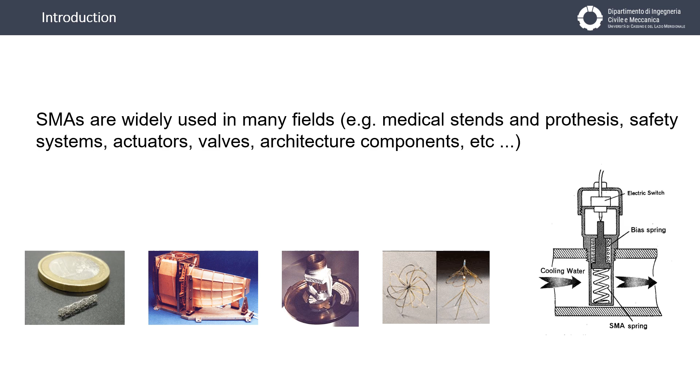There are a lot of shape memory alloys. For example, the copper-based shape memory alloys, which are characterized by not so high performances due to problems of the microstructure close to the grain boundaries. Other shape memory alloys are the nickel-titanium ones that are now most used thanks to their performances and chemical resistance.

So, the recovery of the initial shape takes place if the temperature is greater than a critical temperature and the material is able to recover the initial structure. In case of the environment temperature lower than the critical temperature, it is necessary to heat the component to recover the initial shape, and in this case the material is named as shape memory.

Elsewhere, if the critical temperature is lower than the environment temperature, the material is able to recover the initial shape without extra energy, recovering the initial shape by itself. In this case, the material is named as shape memory alloy with a pseudo-elastic effect.

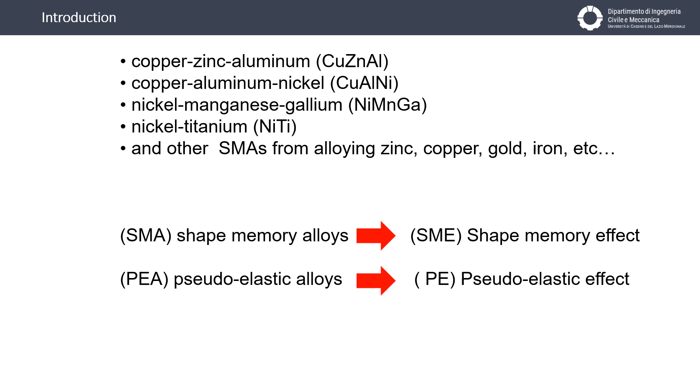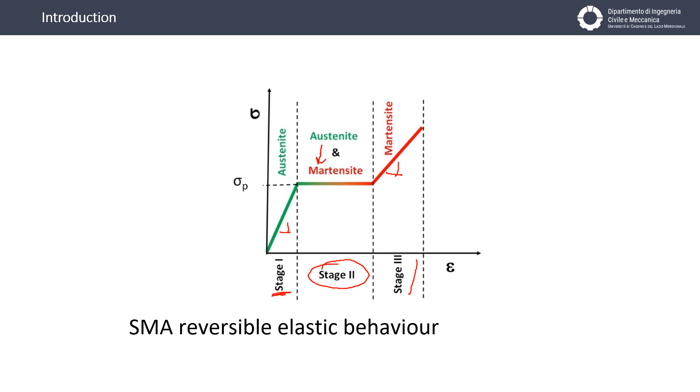And then over this stage, we have the third stage, characterized by a slope different to the slope of the first stage. This slope is the slope of the martensite. This schema is usually used for calculus of the behavior of components, but it is just a simplified schema.

Considering that shape memory alloys are characterized by microstructure changes due to the external loading, the question is, which are the kinds of microstructures we can see in this kind of alloys, and which is the microstructure evolution? And another question is, which is the influence of the microstructures on the behavior of the material in terms of stress-strain?

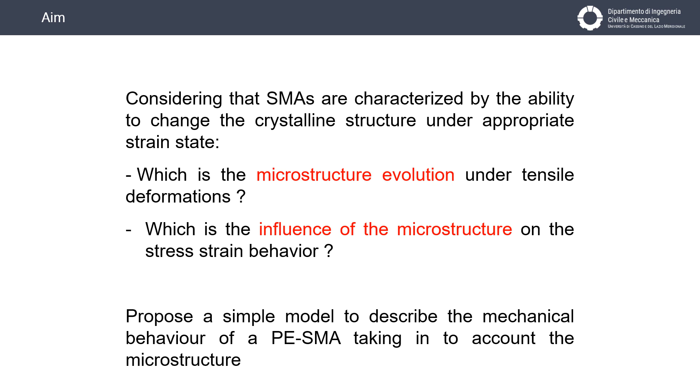In this work, we proposed a simple model able to describe the mechanical behavior of the shape memory alloy characterized by a pseudo-elastic effect, which takes into account the real microstructure of the material. In order to better describe the phenomena, we start from the experimental results.

And the first step has been to produce the material using a vacuum crucible placed in a furnace without air, and using a noble gas like argon in order to eliminate oxygen inside. We use a crucible made of yttria because yttria is very stable in terms of chemical action, and the casting has been in a mold made of graphite, as you can see in the slide.

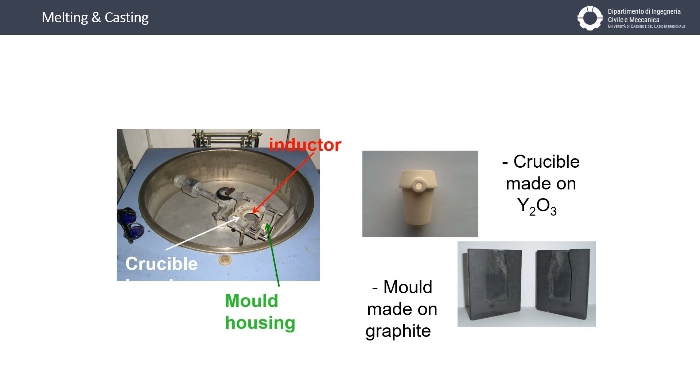The product of the casting is the ingot. It's a very short ingot. The height is around 5 centimeters, and the material has been characterized both in terms of the chemical composition. You can see that the quantity of nickel and titanium in atoms is quite similar, and in terms of microstructure, you can see the magnification. This is around 500x magnification.

Then, starting from the ingot, mini dog bone specimens have been produced like this. You can see that the calibrated length is around 16 millimeters, and the total length of the specimen is 30 millimeters.

This specimen has been put in a tool. It's a patented mini machine, which allows us to perform a loading test using a load cell in order to measure the total force applied on the specimen, and with an LVDT we can control the movement of the crosshead. This tool is able to put the specimen under load inside of a machine able to perform the XRD test in order to observe the diffraction spectrum, which is the base to better understand the position of atoms, and in this case the structure, the microstructure.

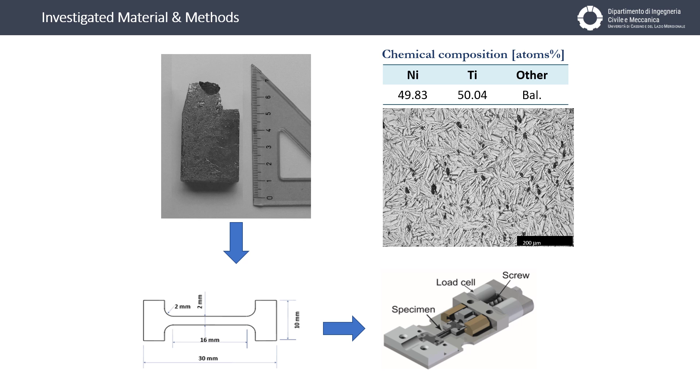Tests have been performed by using a loading and unloading cycle test, and here we can see the first cycle split in two different cases. The first one is the loading condition, with the first stage characterized by the presence of austenite. The second stage is the plateau, but you can see the plateau is not characterized by a slope equal to 0; the slope is greater than 0. It's the minimum slope that you can see in these curves.

Then we have the third stage characterized by the slope of the martensite. In the unloading condition, you can see the third stage is wider than the first one, and then we have a different second stage where we have a transformation of martensite into austenite. It is a reverse transformation, and then the first stage is very short here, characterized by the recovery of elastic energy of the austenite.

In order to analyze the position of atoms in the microstructure, we have to perform X-ray diffraction on the specimen, and we use the tools described in the previous slides, using a step-by-step technique. The steps investigated go from loading conditions to the unloading condition. We used different steps, 2.5% of engineering deformation and so on, up to 10% of engineering deformation. And then in the back direction, we used loading steps in order to perform the diffraction on the calibrated length under load.

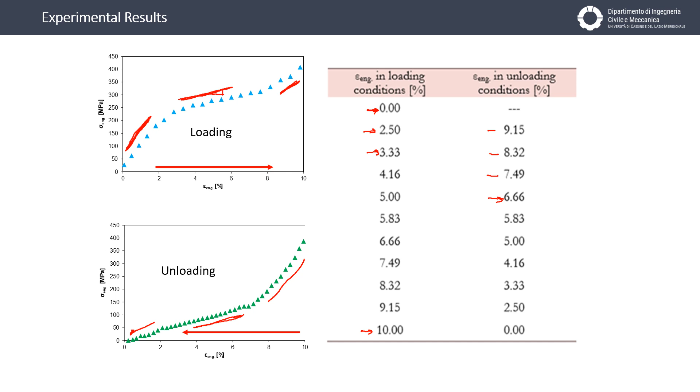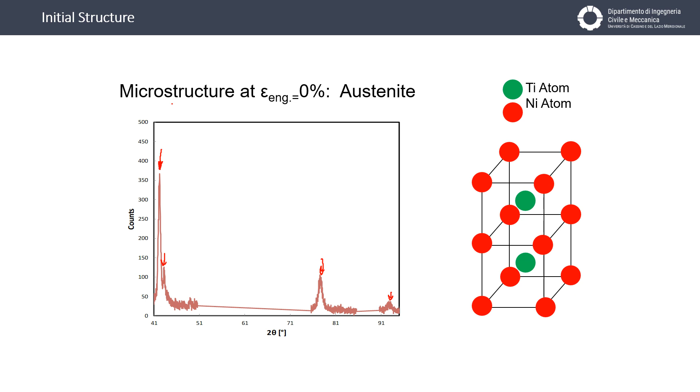This is an example of a spectrum measured by diffraction on the calibrated length in undeformed condition. In this case, the material is characterized by the presence of austenite, and the first peak is the main diffraction peak of austenite, followed by the second peak here and the third peak here. We have another very short peak here, but 3 peaks are sufficient to interpolate the data in order to calculate the cell parameter. In this case, we discovered that the cell is cubic, with nickel atoms on the vertices of the cell and the titanium atom inside each cell.

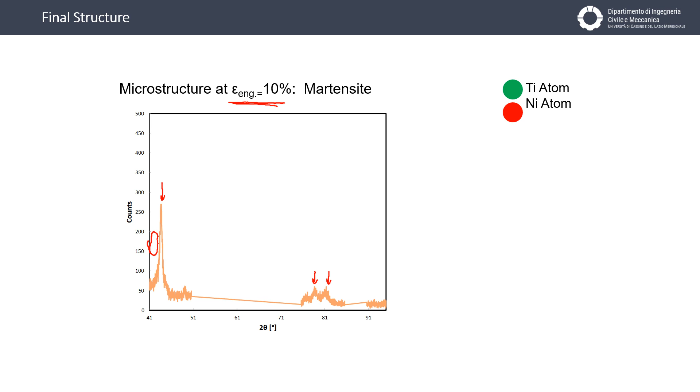The spectrum taken at maximum deformation, 10% of engineering deformation, shows that the first peak of austenite disappears. It was around this position, and all the peaks disappear. It means that the martensite is 100% of the material. And the main peak of martensite is this, followed by the second and the third one. Elaborating these peaks, the microstructure seems to be this, characterized by an angle different from 90 degrees. This is a monoclinic cell, in which the nickel and titanium atoms are positioned on the vertices of the cell.

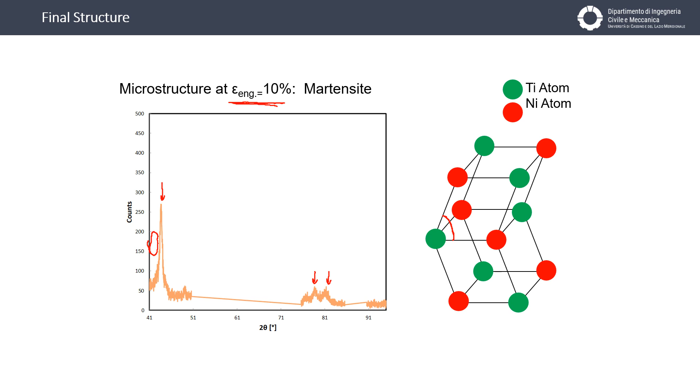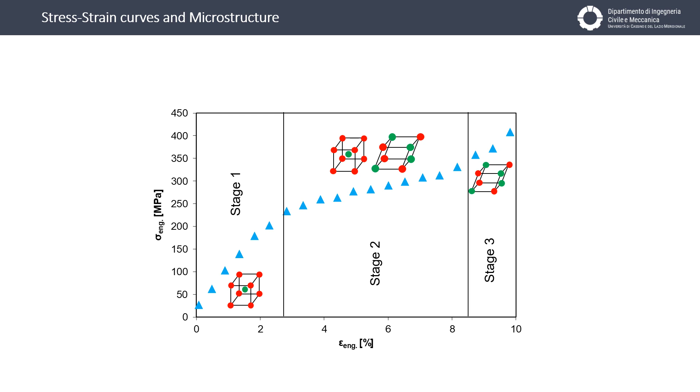It means that, for example, in loading condition, we start with a material characterized by stage 1. Then we have stage 2, sometimes named a plateau, but it is not a real plateau, and the third stage. At the first stage we have a cubic cell. At the third stage we have a monoclinic cell. In stage 2 we have the presence of both of them, cubic and monoclinic cells.

Considering all the tensile steps, in the first spectrum we can calculate the cell parameter of a cubic cell. Using the initial deformation step of 2.50%, we can see that the position of the peaks changes in terms of diffraction angles. It means that we have cubic centered cells, but the dimensions are increased. Then we have the peak of the martensite, meaning we have the presence of the monoclinic cell.

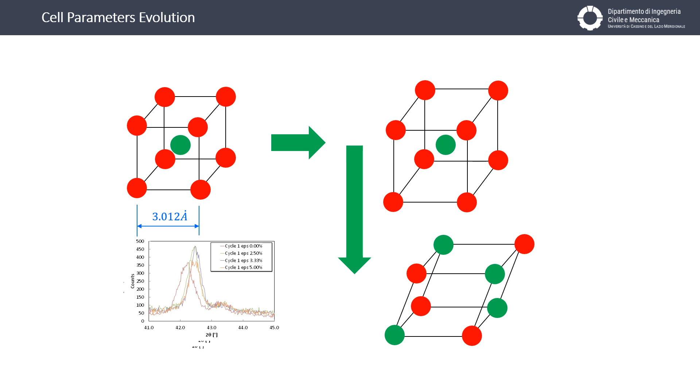To calculate the variation of the cell parameter, from the first spectrum the cell parameter is around 3.012 angstrom. At 2.50% of deformation, the cell parameter increased up to 3.072 angstrom, and the monoclinic cell has an angle of 80 degrees. The first cell parameter is 2.6 angstrom, and the second one is 3.8.

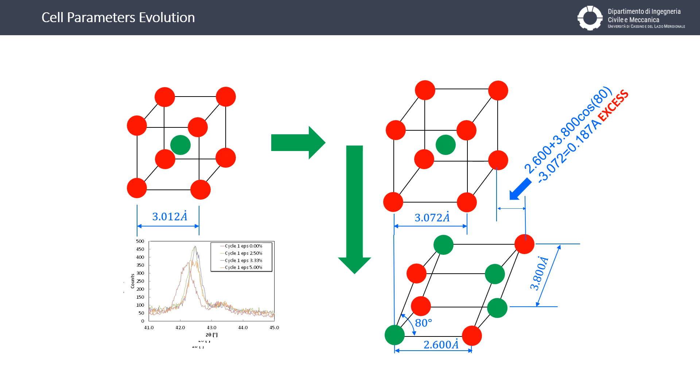Considering as zero the position of the titanium atoms on the bottom of the monoclinic cell, you can calculate the distance in the plane direction, in the x direction, of the nickel atom as this. And we can see we have an extra deformation of 0.187 angstrom. This extra deformation characterizes the presence of the plateau.

The excess in the position of the titanium or nickel atoms is responsible for the decreasing slope from the first stage to the second stage of the stress-strain curve, because the excess deformation when a cubic cell becomes monoclinic relaxes all the cells around this transformation.

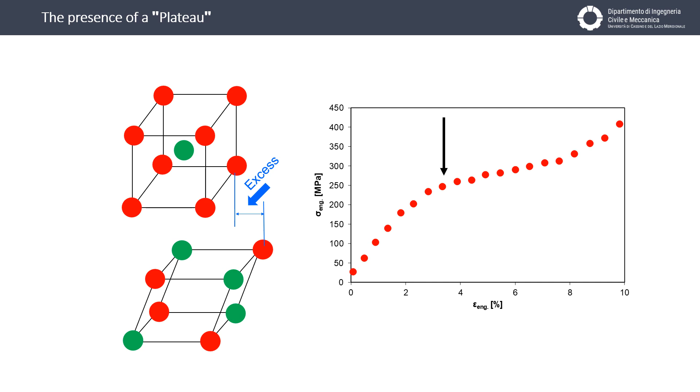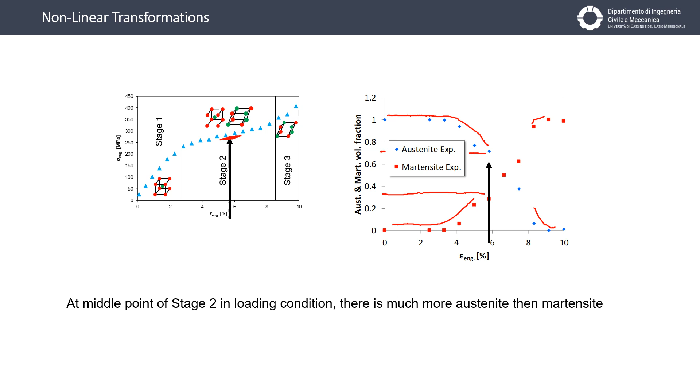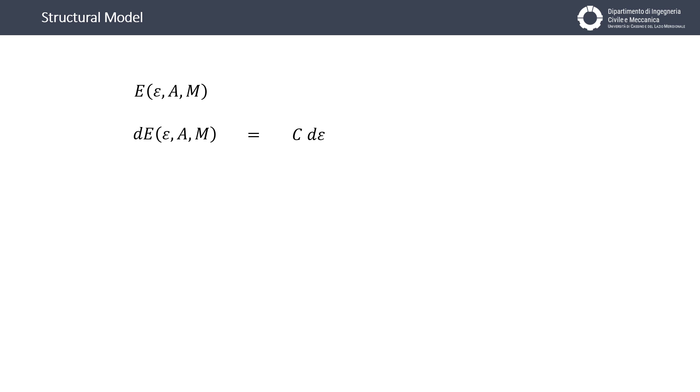In order to model the variation of a microstructure, we hypothesized the presence of an energetic potential E, which depends on deformation epsilon, but depends on the quantity of austenite and martensite too. In differential form, the variation of this potential is equal to the linear contribution of the deformation epsilon, multiplied by a constant c. In this case, the model is perfectly linear. It's the model that we can see in literature.

But in this case, we use the contribution of the austenite in this manner, the variation of austenite on the quantity of austenite, plus the contribution of the martensite in the same manner, but using a negative sign, because we postulated that the austenite transforms into martensite and vice versa without any other intermediate phase. The equilibrium takes place when this differential is equal to 0, like this.

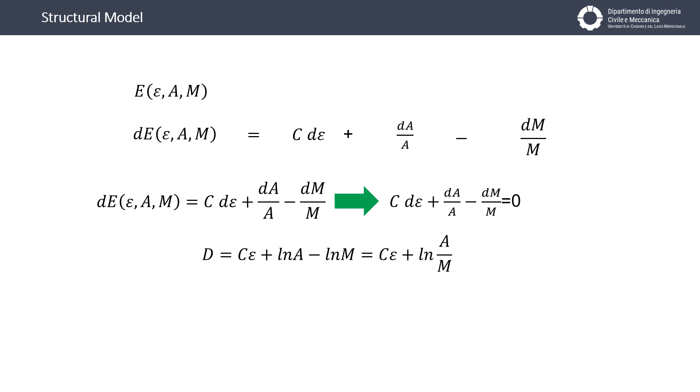And integrating this equation, you can see that the formulation is very easy. A constant d is equal to the constant c, which multiplies the deformation, plus the logarithm of austenite on martensite. Taking into account that the sum of the quantities of austenite and martensite is equal to 1, you can calculate the quantity of martensite like this, and the quantity of austenite like this. These are the equations which calculate the quantity of martensite and austenite during a deformation process characterized by a deformation level epsilon.

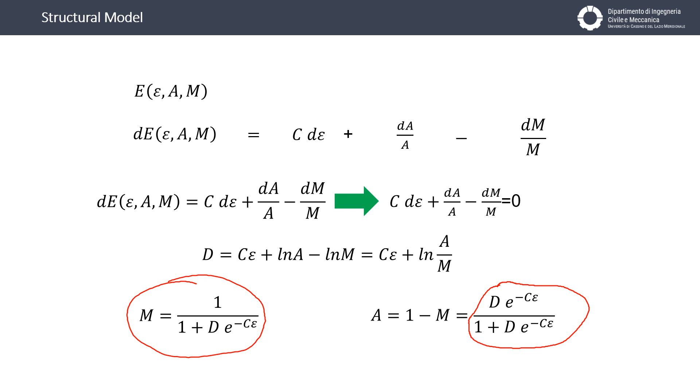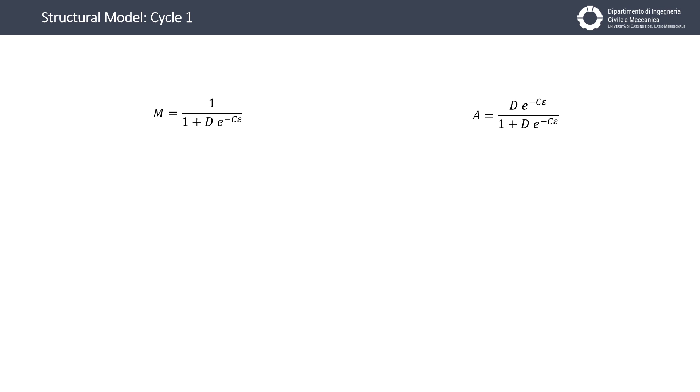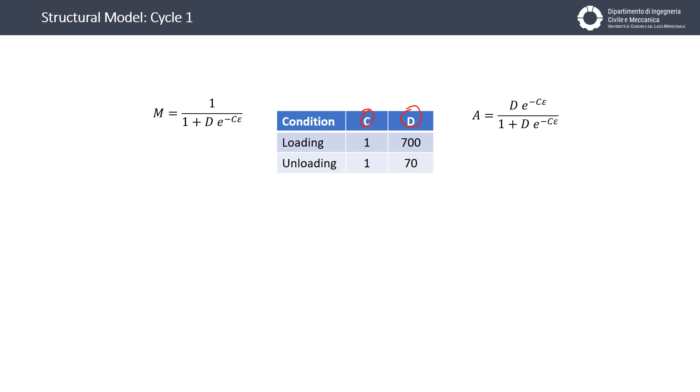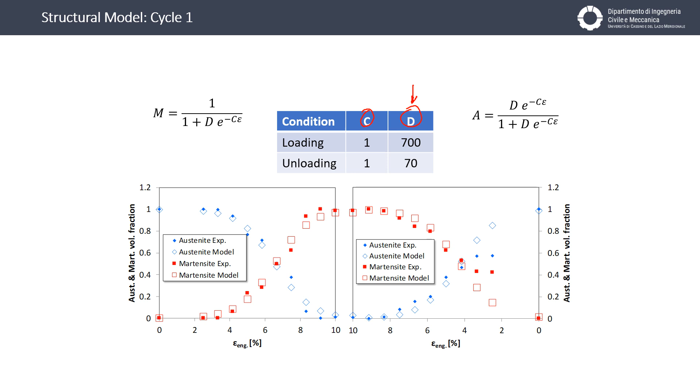Considering the results in terms of quantity of martensite and austenite taken from the step-by-step tests in loading and unloading conditions at the first cycle, we can calculate the values of the parameters C and D. You can see that C is always equal to 1 and D changes from 700 to 70, and in this case the parameter D takes into account the hysteresis of the material. In the graph you can see how the plotted functions seem to fit well the quantity of measured microstructures.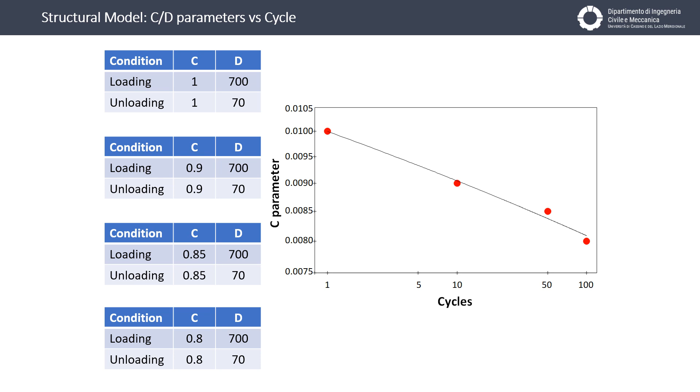In terms of mechanical behavior, we can introduce a modified Young modulus of the material, starting from the Young modulus of austenite and martensite, for example, weighted by the quantity of austenite and martensite. It's a really easy formula, but it doesn't work because the E in this formulation ranges from the E of austenite to the E of martensite and never assumes values close to 0. In the second stage, we saw the presence of a region where the slope tends to 0.

It doesn't work because not all the structure participates in the increment of the stress versus an increment of the strain. This is due to the phenomenon of transformation of austenite into martensite in a tensile test, for example, and it is necessary to correct the quantity of austenite which participates in the increment of the stress, excluding the quantity of austenite which is transforming into martensite. The new formulation is similar to this. We can see that the austenite is corrected by a derivative of the quantity of austenite in deformation epsilon. It means that in this case this quantity doesn't participate in the increment of the stress.

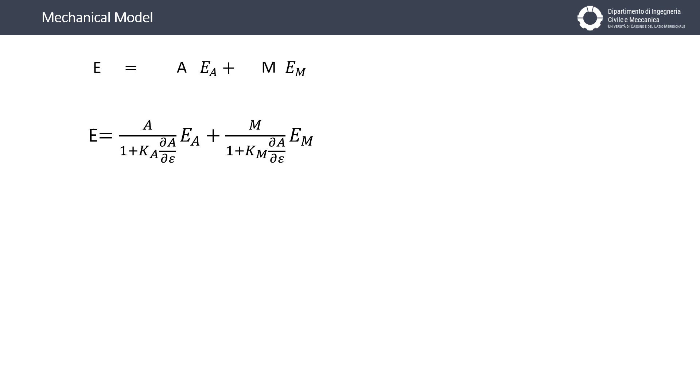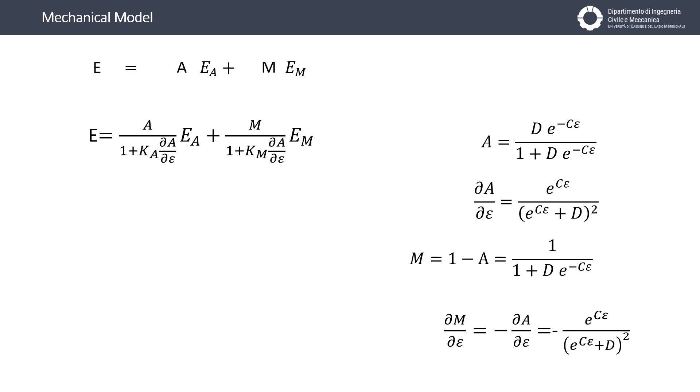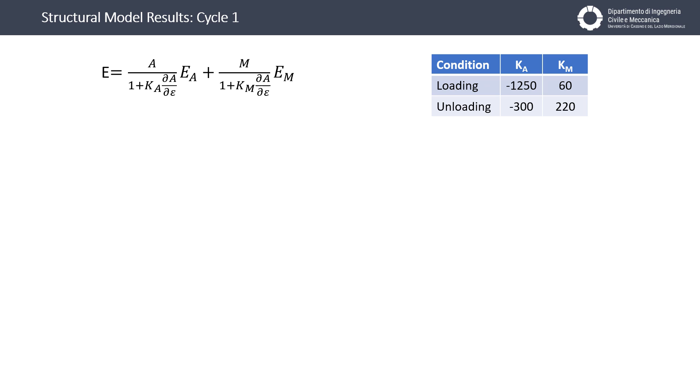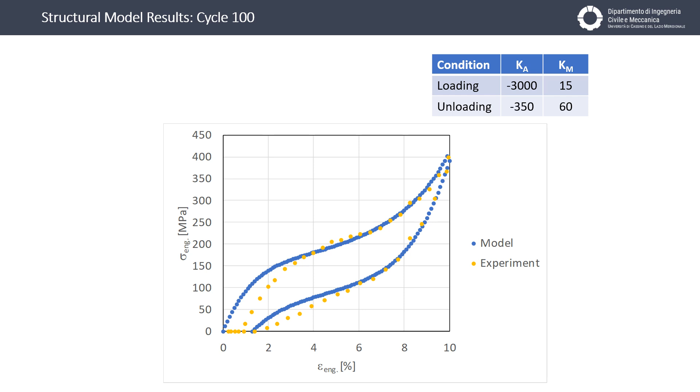In the same manner, we can correct the action of the martensite. The equations of the austenite and martensite are calculated in the previous model, and it is easy to carry out the derivative of the quantity of austenite and martensite as this. We can calculate the parameters K_A and K_M again from the experimental results, and you can see a fitting like this, and in this case the parameters K of austenite and martensite change in loading and unloading conditions. These are the values for the first cycle, and these are the values of the 100th cycle.

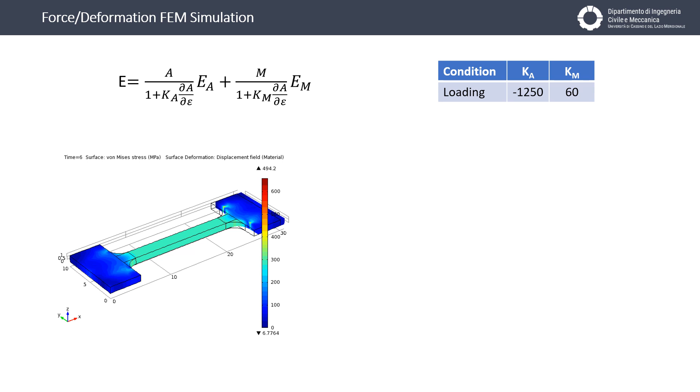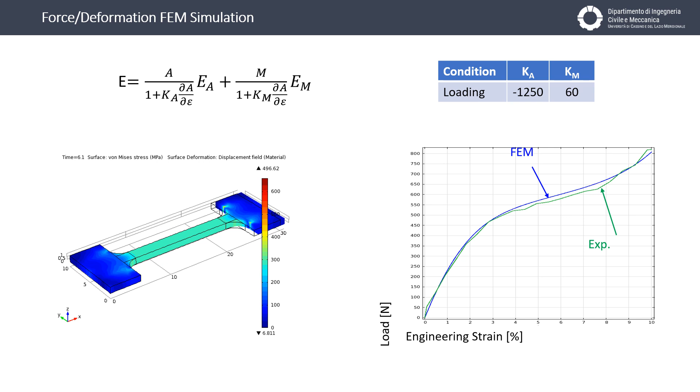In terms of simulation in a commercial software, you can see the variation of the deformation and the increase of the stress in this simulation. And here you can see the calculated load on the head of the specimen during the deformation in tensile stress at the first cycle. You can see that the results fit very well the experimental results.

In conclusion, we proposed an easy model able to calculate the quantity of austenite and martensite during the loading and unloading process, and it's able to predict the stress-strain behavior of shape memory alloys, taking into account the real quantity of austenite and martensite present in the material. This model is easy to implement in commercial software, but takes into account just materials characterized by the presence of two phases, austenite and martensite, without any other phases. But the extension of this model, I think, is not so hard to formulate.